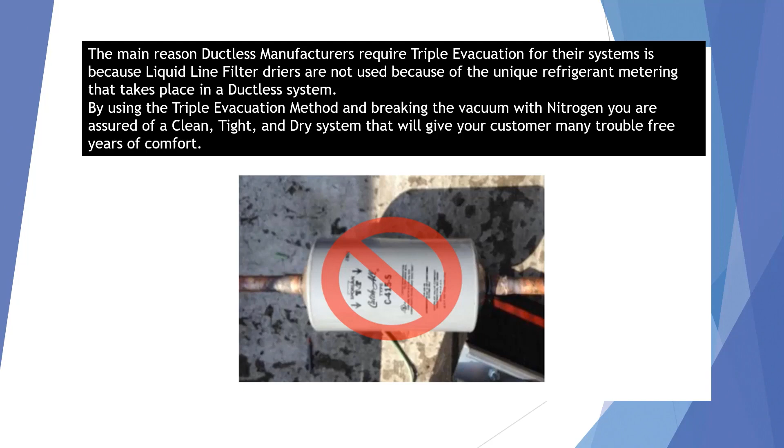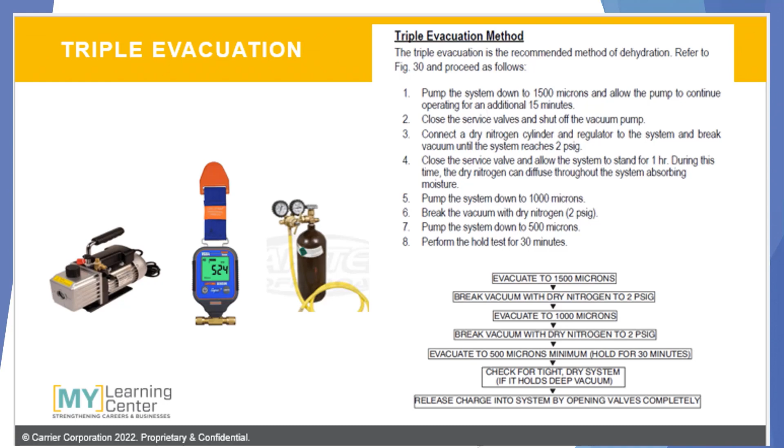This is a page out of one of the major manufacturers' training websites, and you'll notice that for ductless equipment, they call out the triple evacuation method as being recommended for dehydration of the systems. Once you have your line sets all hooked up and you're ready to go, the first thing you want to do is do a leak test to make sure that the system is tight before you start pulling a vacuum. Then after that, the triple evacuation method is preferred for ductless systems.

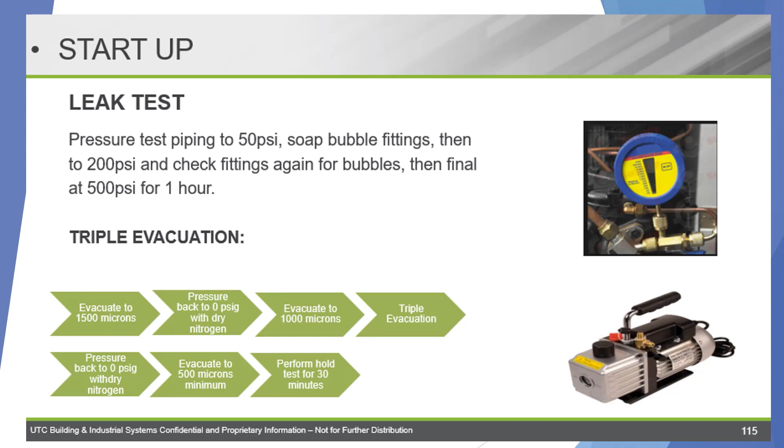So the procedure for triple evacuation is to first evacuate the system to 1500 microns, then break the vacuum with 2 psig of nitrogen. Let the system rest with a nitrogen charge. Then start the second evacuation to 1000 microns. Again, break the vacuum with 2 psig of nitrogen and let the system rest with a nitrogen charge. Then conduct the third evacuation down to 500 microns. At that point, check for a tight, dry system. If it holds the deep vacuum, then you're ready to charge the system.

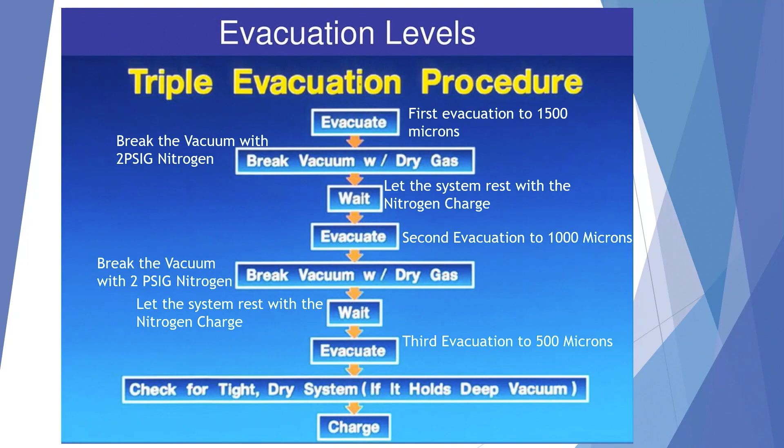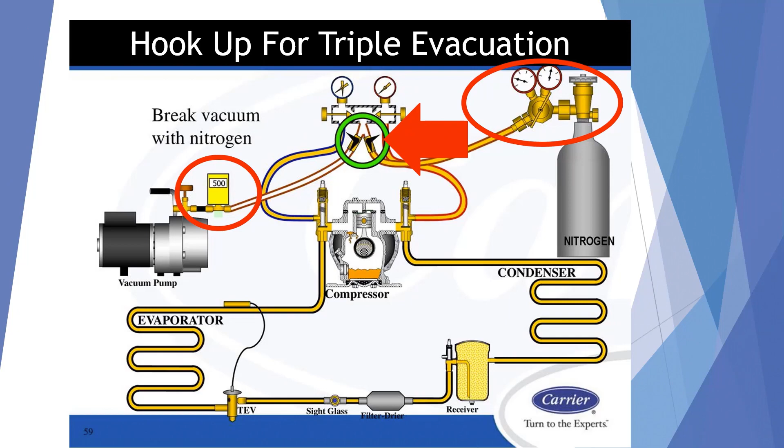I have seen some ductless systems pulled down below 50 microns. You need to be careful in that deep a vacuum as compressor oil will begin to boil at about 200 microns. There is some disagreement regarding this statement, as in a true vacuum, liquids do not exist, and so you can't have boiling without liquid. But most major manufacturers recommend not pulling a vacuum below 200 microns.

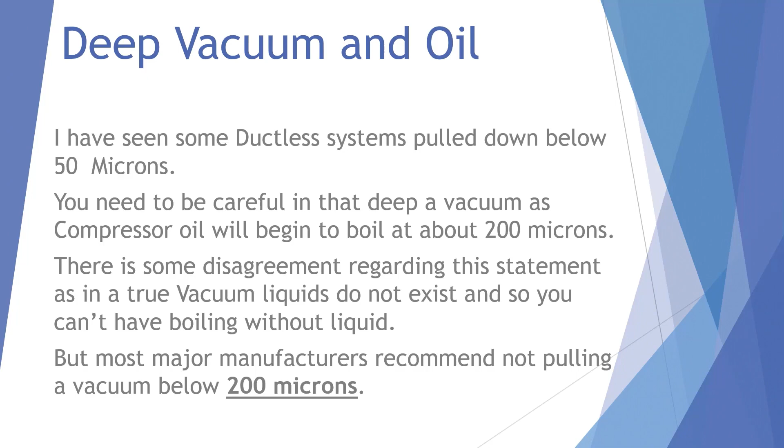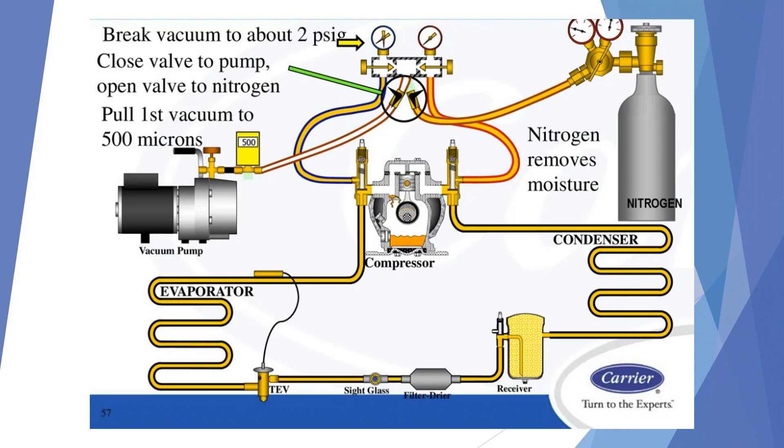So this slide is showing that we are breaking our vacuum to about 2 psig with the nitrogen. And as we stated, you want to close the valve off to the pump so that we maintain our vacuum on the line set and open the valve to nitrogen, as the nitrogen will flow through the system and will remove the moisture that is in the system.

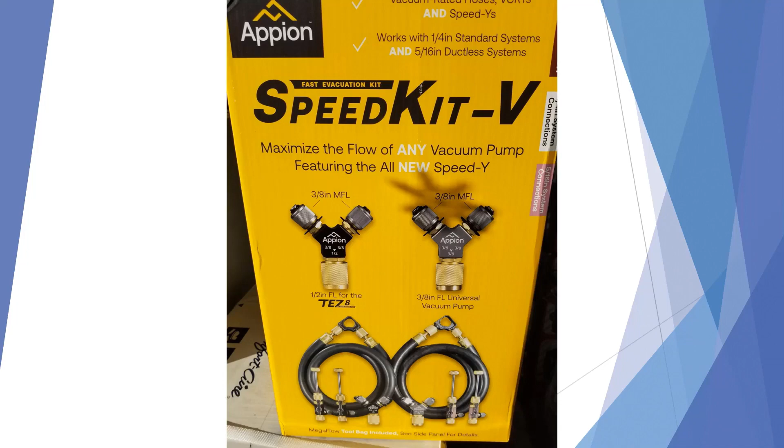In some previous videos that we've done on evacuation, we've mentioned the Appion Speed Kit, and we'll mention it again here as it's designed to be used mainly on ductless systems, and it has various fittings and hoses that you can use to speed up the evacuation on a ductless system. In most of my training on evacuation of HVAC systems, I talk about not using a manifold gauge set. The hoses on a manifold gauge set are too long and too skinny, and so it's better just to use fittings with the larger hoses to speed up evacuation time. Time is money, and so on a job where you need to pull a triple evacuation, by reducing the time of evacuation, it will make it a lot easier to get this job done quickly.

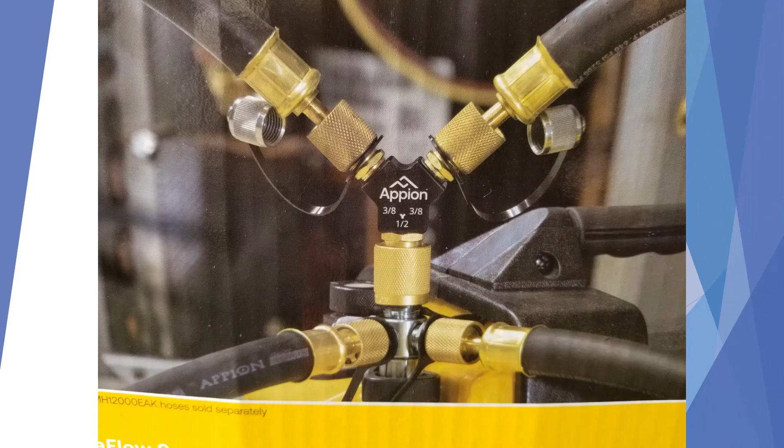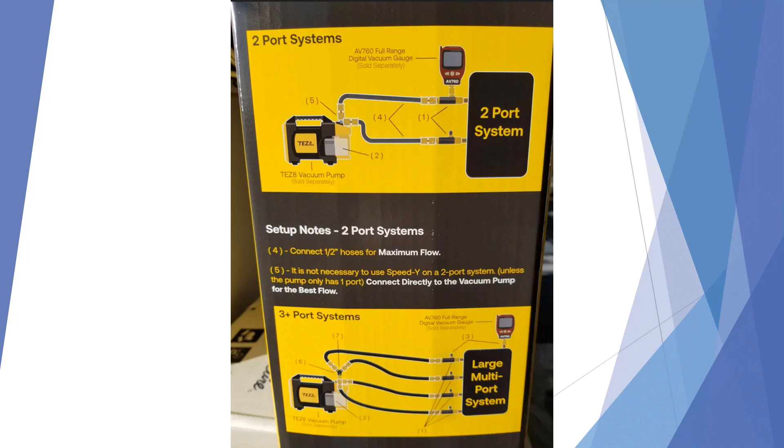So with this Appion kit, you can pull from both sides in a 2-port system, decreasing your time of evacuation. And on a ductless system with multiple ports, you can use the multiple fittings to pull from all ports, further decreasing your evacuation time. So the name of the game with evacuation is to reduce the evacuation time as much as possible.

This chart shows us that if we're evacuating a 10-ton system to 500 microns and we're using a 6-foot 1/4-inch hose, and leaving the valve core in the service valve, it's going to take 40 minutes to reach 500 microns. But if we're doing it through a 6-foot 1/4-inch hose with a core removal tool and taking the core out, it'll reduce that 40 minutes to 19 minutes. We can reduce it further by using a 6-foot 1/2-inch hose with the core removed, and then our evacuation time to 500 microns will be 3 minutes.

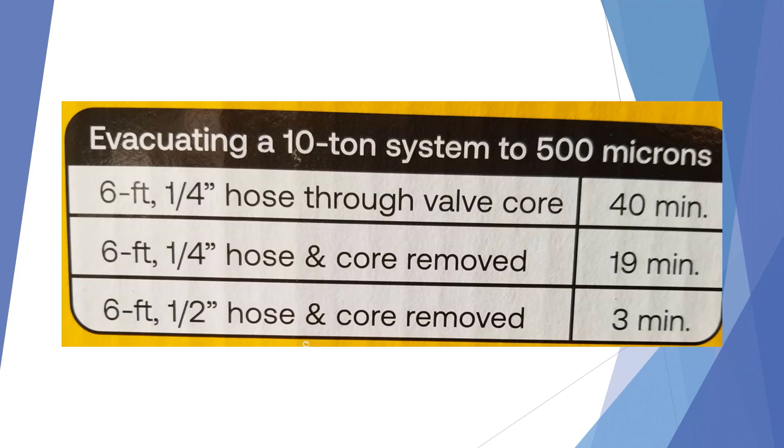This may be breaking news to some people who have taken classes where you're told that nitrogen absorbs moisture. Well, breaking news, nitrogen does not absorb moisture. This is why we use the term sweeping the system with nitrogen. By moving nitrogen through the system after pulling a deep vacuum, it moves the oil, causing it to release more moisture being held in the oil and sweeps it out of the system. Nitrogen also warms the system after deep evacuation so that if any moisture is frozen, it will melt and be taken out of the system by the nitrogen purge.

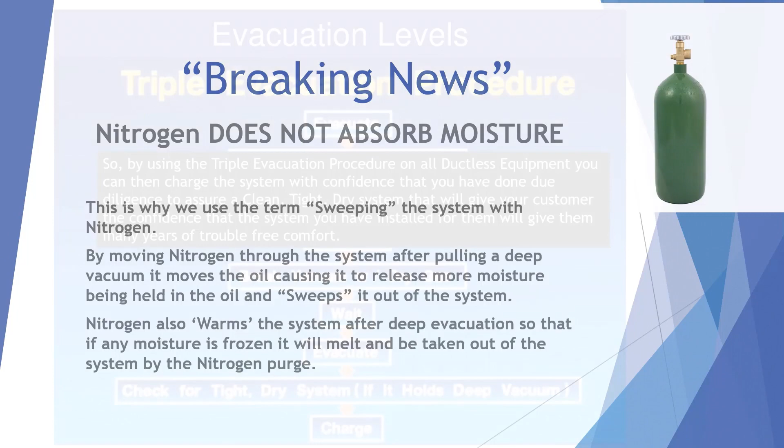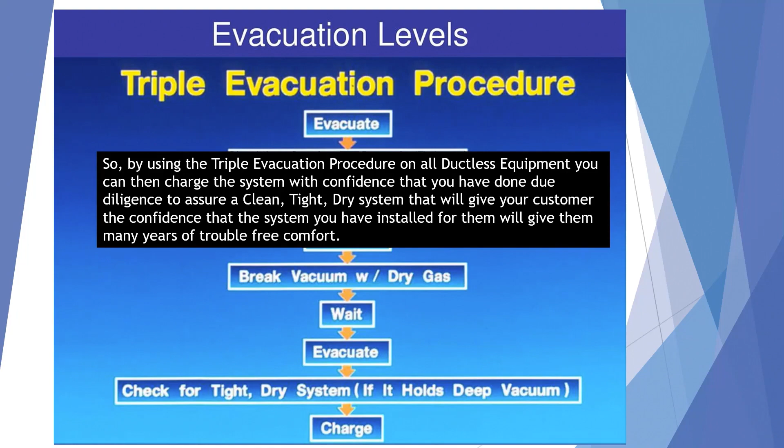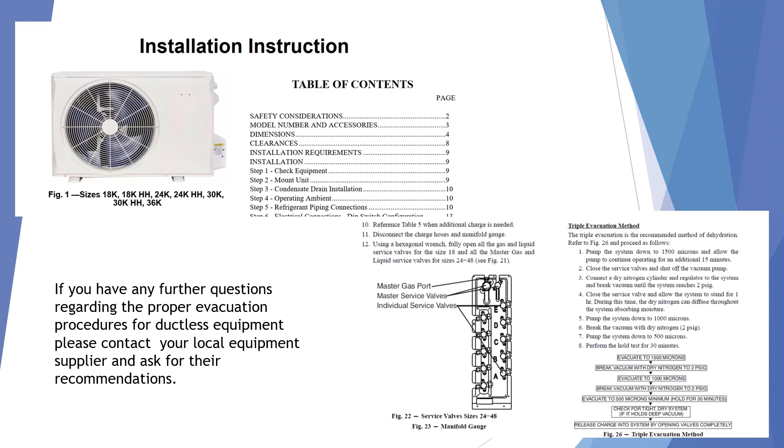So by using the triple evacuation procedure on all ductless equipment, you can then charge the system with confidence that you have done due diligence to assure a clean, tight, dry system that will give your customer the confidence that the system you've installed for them will give them many years of trouble-free comfort. If you have any further questions regarding the proper evacuation procedures for ductless equipment, please contact your local equipment supplier and ask for their recommendations.